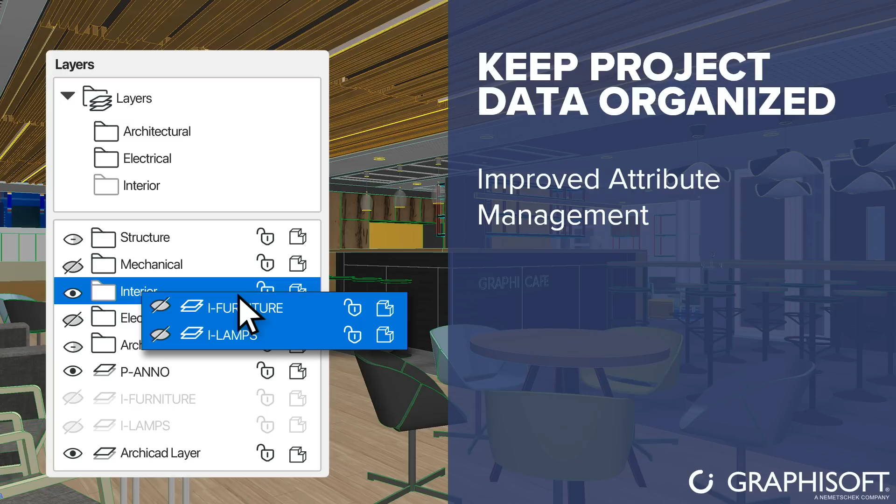Attributes and the Attribute Manager are essential tools for BIM managers and project architects to organize project element-related information for the entire life cycle of the project. So with the latest developments, Graphisoft makes the navigation of attributes easier and more intuitive by delivering a more structured hierarchy to save you time for project management. This way, you can focus on the creative work.

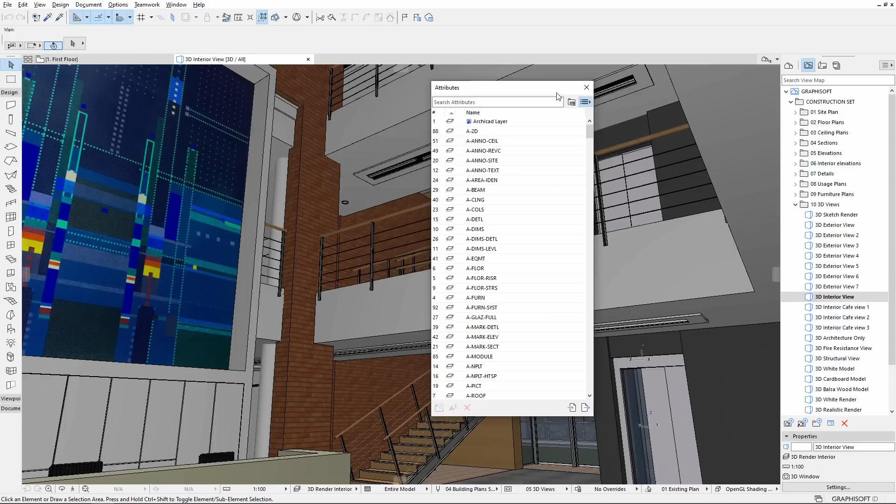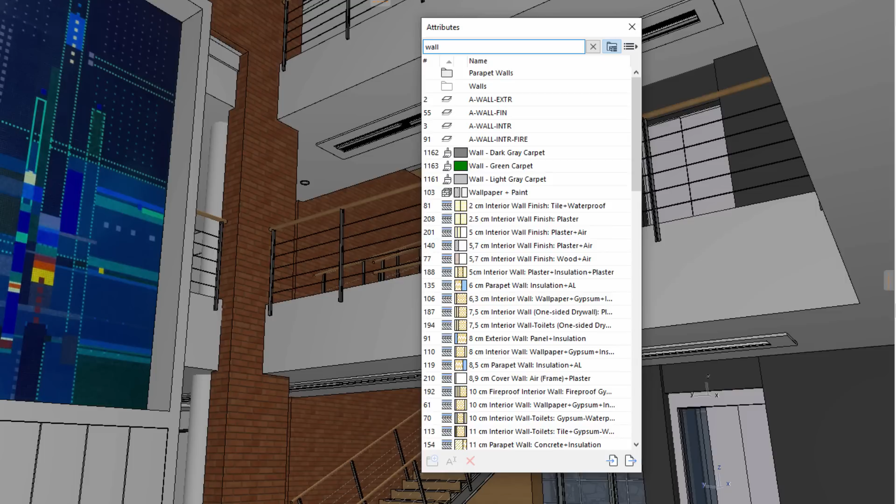The streamlined Attribute Manager palette makes the searching, sorting, and managing of your attributes more comfortable and easier. It reduces the movement between menus so you can get direct and easy access to any of the attribute settings. You can now create folders to organize attributes in a logical hierarchy that works for you and your project.

With the introduction of a search tab at the top, Archicad increases user productivity immensely by allowing you to locate the attributes you are after within seconds, so you can drag and drop them inside folders. This, in turn, avoids attribute-related inconsistencies.

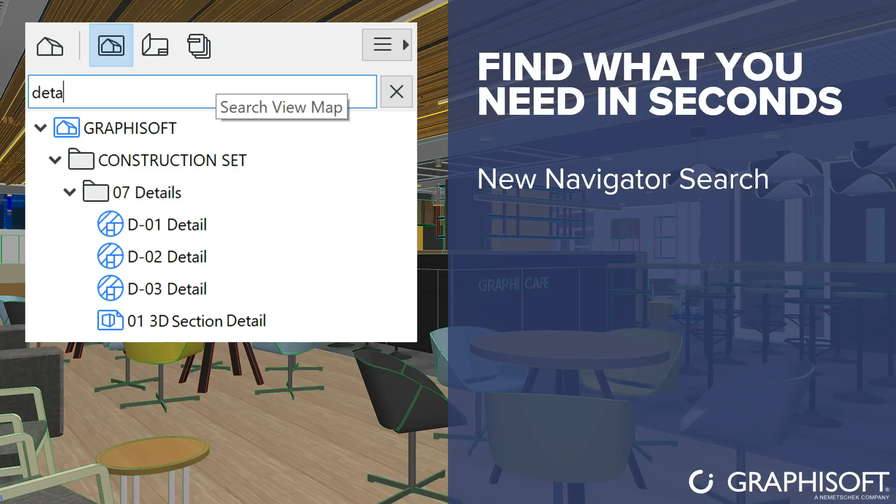One of the crucial factors working in any size BIM project is to keep a clean structure, so that when searching for a specific element in a large set of data, we can easily and efficiently find our way around. In our work, we all know that our projects can evolve extremely fast and have hundreds of sections, elevations, details, or drawings.

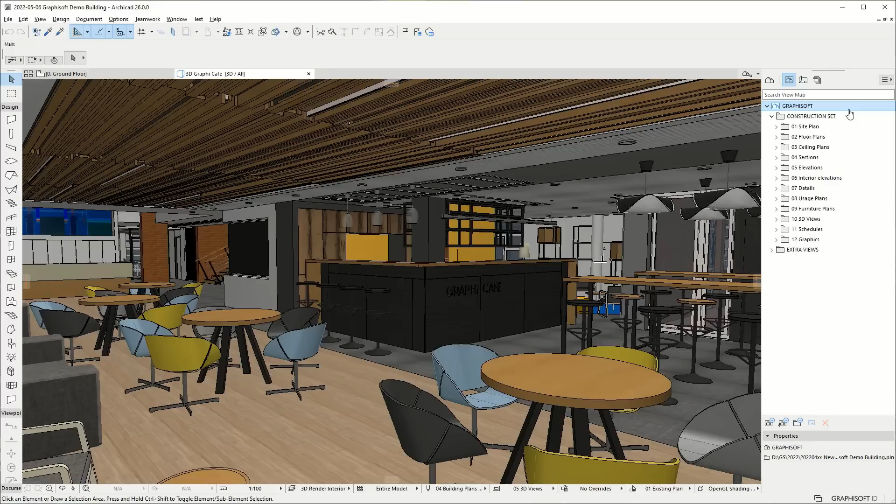In Archicad, we manage these in the navigator maps. Now, this brand new and powerful search bar we have seen with the attributes is also available across the navigator. We can search and find any item by name without having to scroll through lots of folders across all the tabs. This gives us the power to navigate inside the project easier and quicker and simplify the overall user experience by saving significant time every day.

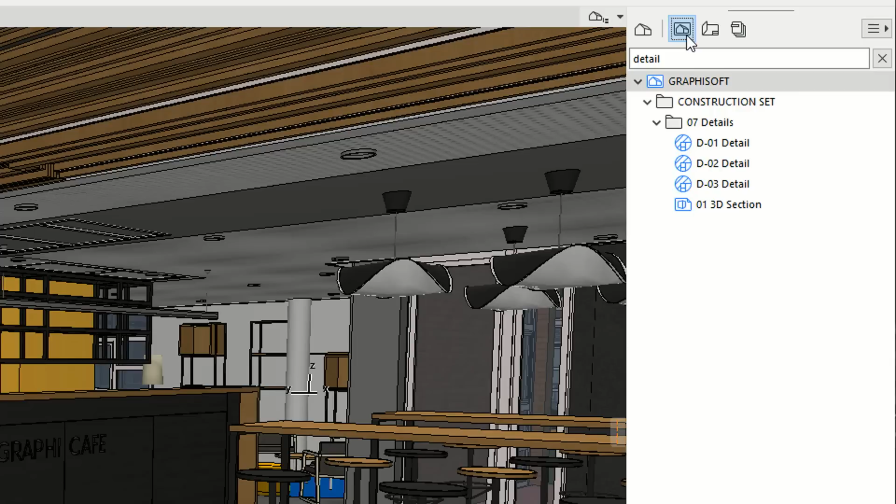Any item selected during the search will be remembered when switching between maps, and closed folders will open during a search, and their state is remembered when clearing the search. And after the search, once the view is highlighted, users now can continue with their work instantly inside that view without losing any time.

As stated by our many beta testers, this fantastic function provides an intuitive and easy solution to keep the organization of views and documentation deliverables, and at the same time, it helps streamline the management workflow in projects with large documentation sets.

Developing project-specific custom content and office standard libraries faster is essential for improving design productivity. Creation of parametric objects enriched with BIM data is now more convenient than ever before with the introduction of a library part maker as a native palette in Archicad, as an additional benefit for forward users. What a great opportunity for those who would like to indulge with their creative sides.

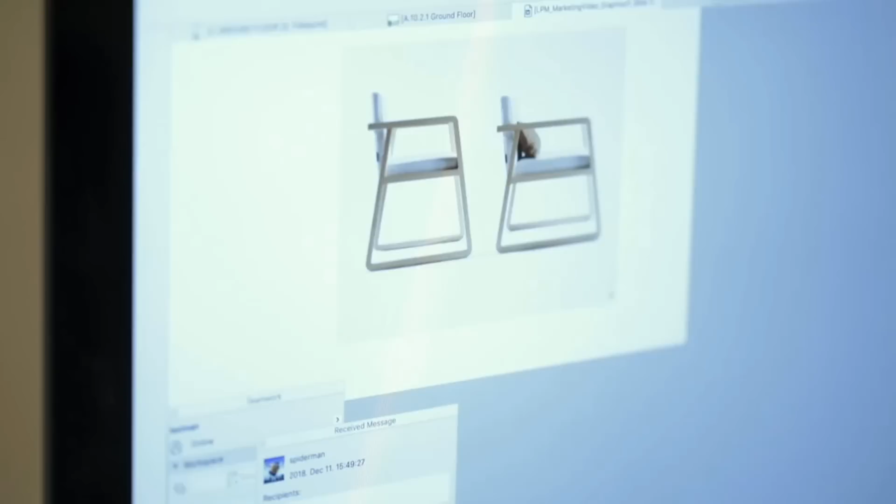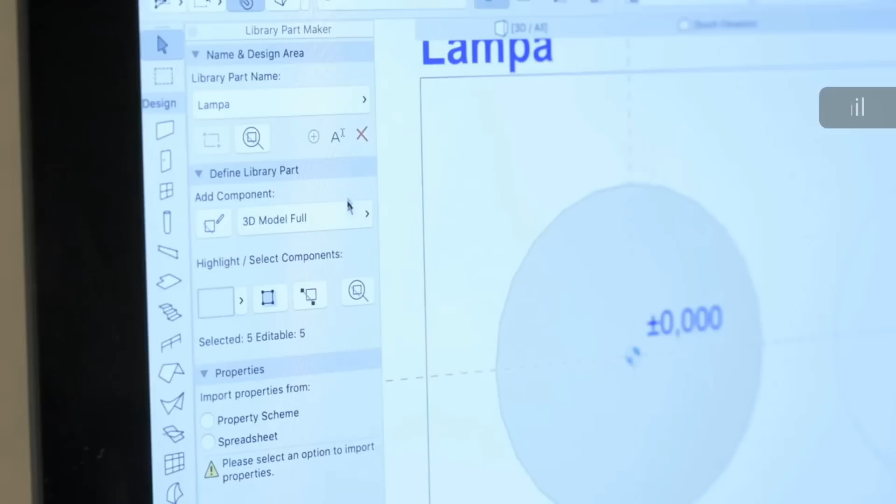With this immensely powerful palette, users can easily create detailed library objects which comply with national standards. Users can quickly create 3D representations for BIM-based workflows and scale-sensitive 2D symbols for traditional documentation within one library part. As part of IFC in BIM, users will be able to attach any data to these library parts with one-click import of data spreadsheets.

In short, by using the Library Part Maker palette, Archicad users can now enjoy a native, data-driven approach while preserving their design freedom. This strongly complements Archicad's software development focus, giving our users the ability to create virtually any custom content as easily as possible and bring their projects to life.

Let's continue with the library content improvements. Every year, Archicad delivers enhanced and updated library content, saving you a great deal of time when modeling. These objects are parametric, meaning you can change them easily on the fly and schedule and quantify with ease, boosting your productivity significantly and accelerating your project visual outcomes.

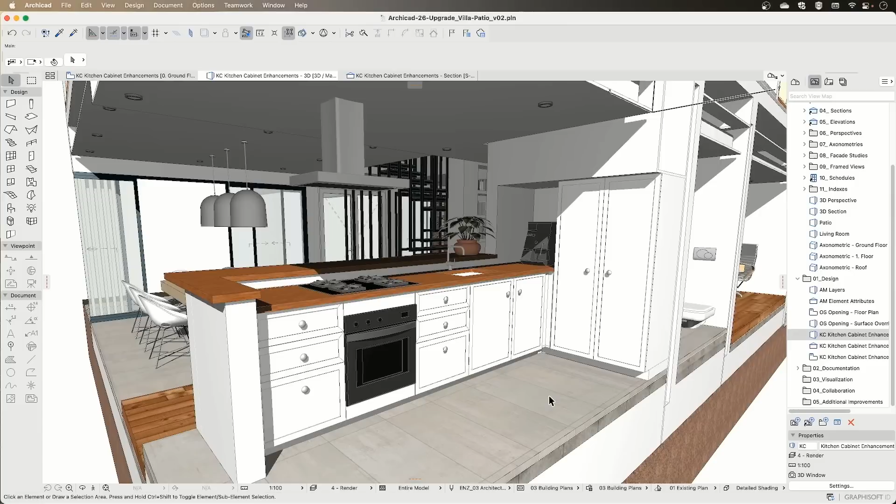For this, we have extended the kitchen cabinets documentation and modeling capabilities. You can now fine-tune the kitchen objects with new frame joinery options, dedicated panels, and undermount sinks. This clearly shows our commitment to constant improvements to our Archicad libraries to keep it relevant and up to date.

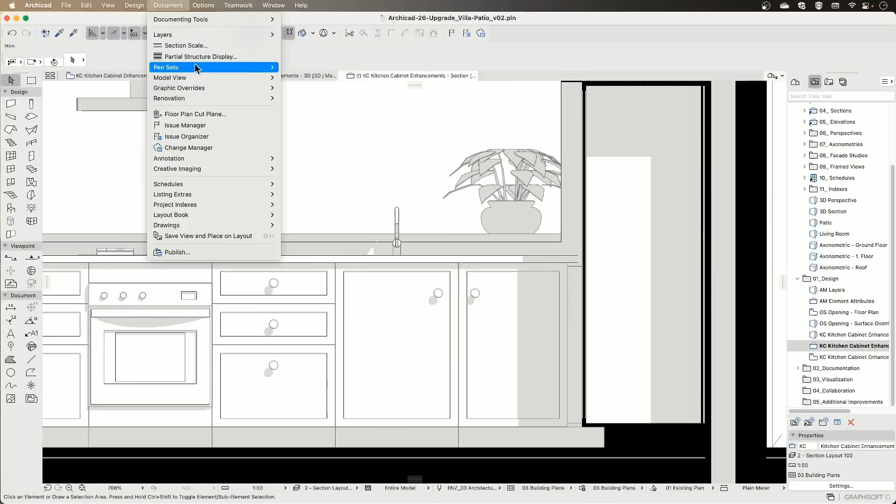You can also control the visibility of counter edges and display the cabinet opening lines in sections, elevations, and 3D with the help of model view options. We are listening to our customers' feedback and provide solutions for the workflow needs.

On top of the brand new features, Archicad also focuses on the fine-tuning of existing tools and workflows based on users' feedback to add value to design and documentation workflows, which are the core tasks of every architectural practice.

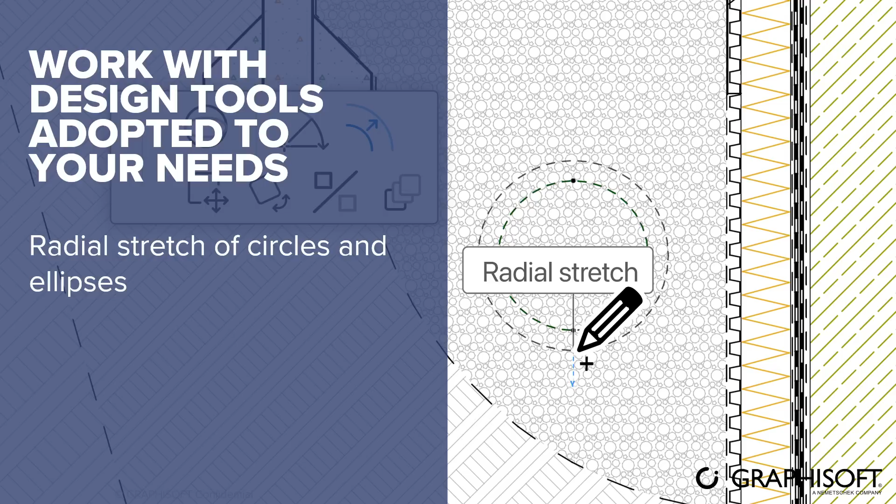One example is the radial stretch copy of circles and ellipses. Archicad users both on Windows and Mac can now click on a node or an edge and create a single copy of circles or ellipses more efficiently in an updated and modernized PET palette.

Consistency in how similar tools work in a software is essential for better usability, increased creativity and productivity, and faster learning curve. The software adapts itself to the architect's workflows and not the other way around.

The construction industry relies on drawing-based deliverables and extensive documentation sets that must comply with local drafting standards. Archicad 26 significantly accelerates the creation of these deliverables by smart workflow improvement solutions. Let's see some examples.

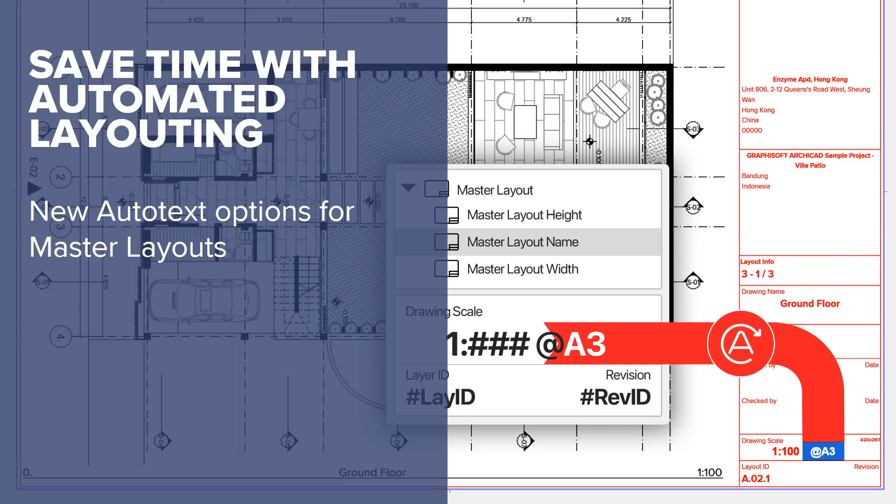Keeping annotations consistent on your drawings is essential for successful project delivery. The new release extends the capability of our Autotext technology, improves documentation quality, and removes an error-prone task by workflow automation.

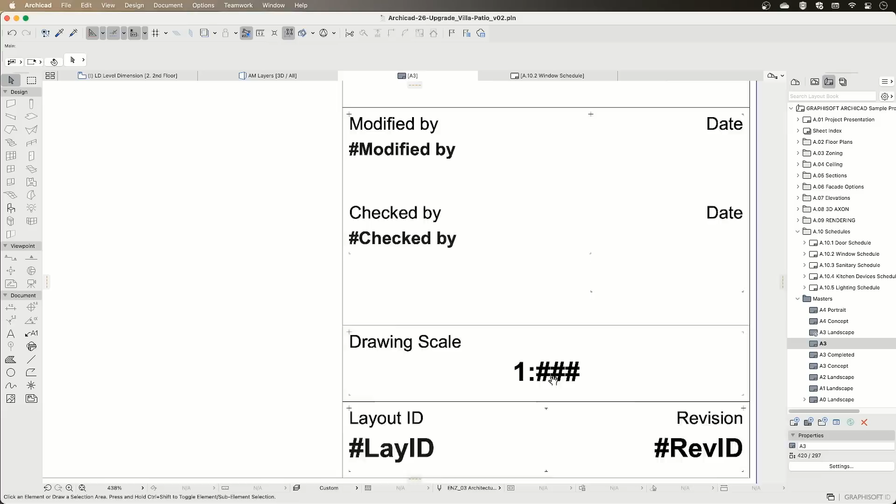The use of Autotext in Archicad introduced Archicad users to great productivity and intuitiveness in documentation. Whether it's an element label on a section or project information on the title blocks, these help architects avoid mistakes when exchanging information. As a result, we have introduced new options including master layout names, their sizes, layout numbers, and total number of layouts in subsets to further accelerate this process.

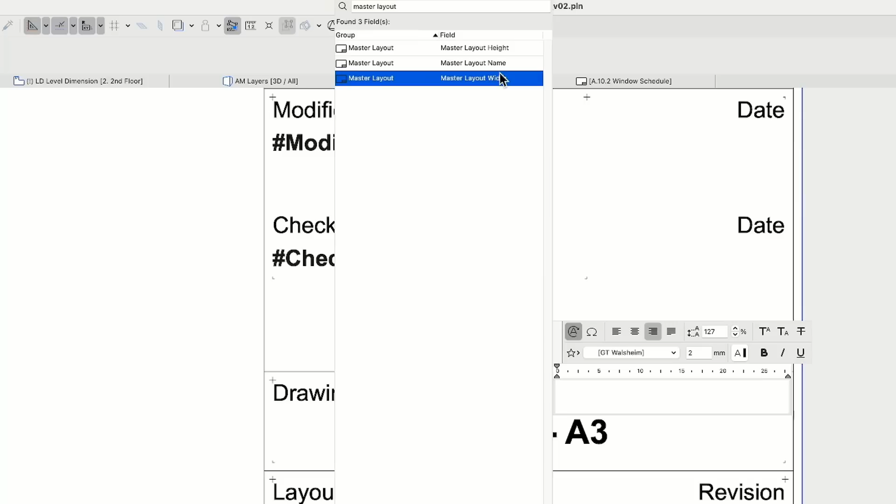This way, users don't need to create multiple project masters, meaning they don't need to spend any time changing multiple layout information manually, and therefore not submitting their drawings with incorrect or outdated information on them.

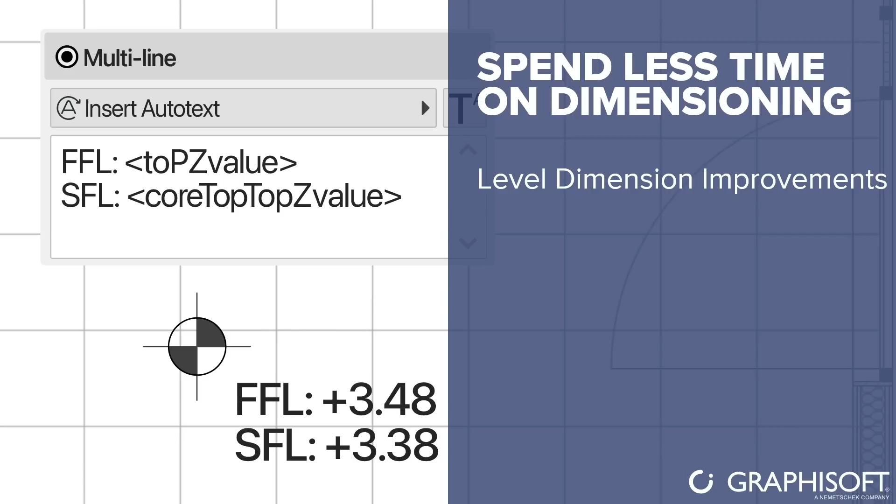Based on several user requests, Archicad has further streamlined the capabilities of the Level Dimension tool to support more documentation standards. The Level Dimension tool now delivers the granular solution that is essential in the documentation process. Let's take a look at the Level Dimension tool improvements in depth.

To start with, we expanded the level dimension for a consistent look and feel against all our other tools. We can now customize the text like other documentation tools, and when associating it to slabs or roofs, we can choose from several extra levels like core top and core bottom to accommodate our various document sets.

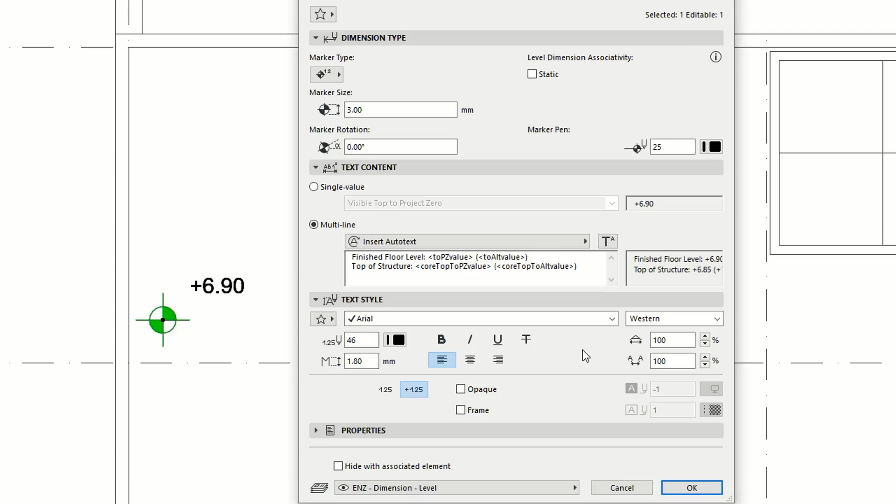These settings can now easily be stored within favorites and updated when needed. Overall, these improvements will automate your project documentation and avoid inconsistency or missing information.

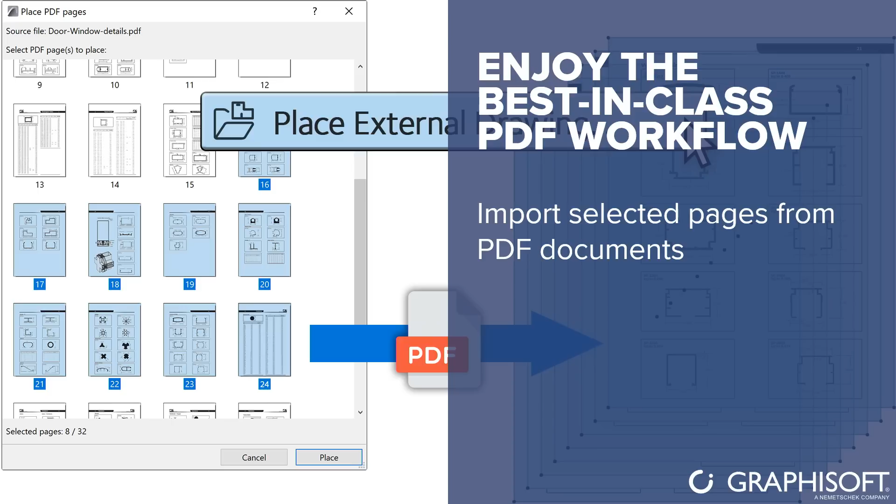Working with the most frequently used industry standard documentation file format, PDF, has also been streamlined. Archicad 26 introduces the selection of multiple PDF pages for efficient import of additional information.

Users can now place multiple pages from the same PDF into their model views or layouts in one go. This function will work either by dragging and dropping your PDFs into your model view or using the drop-down menus. By holding the Shift or Control keys, you can now select several pages at the same time and distribute them to the correct views.

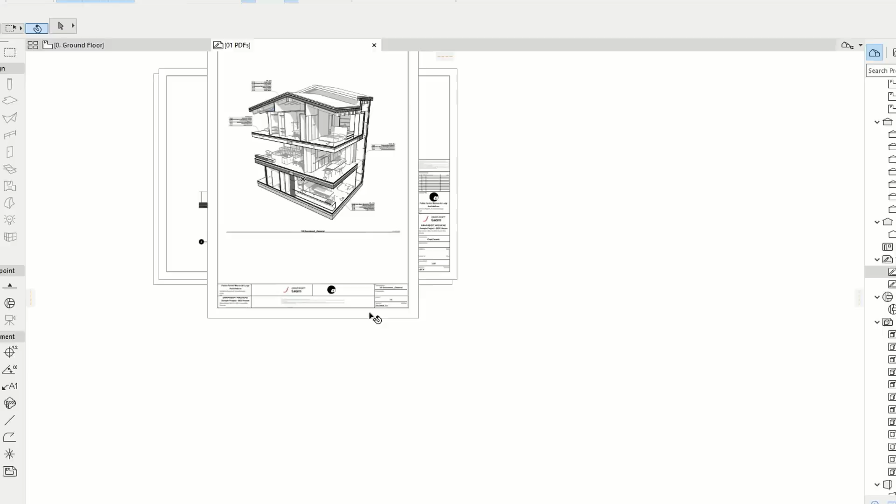This lends itself to a faster and efficient workflow without repeating the same process unnecessarily and manually.

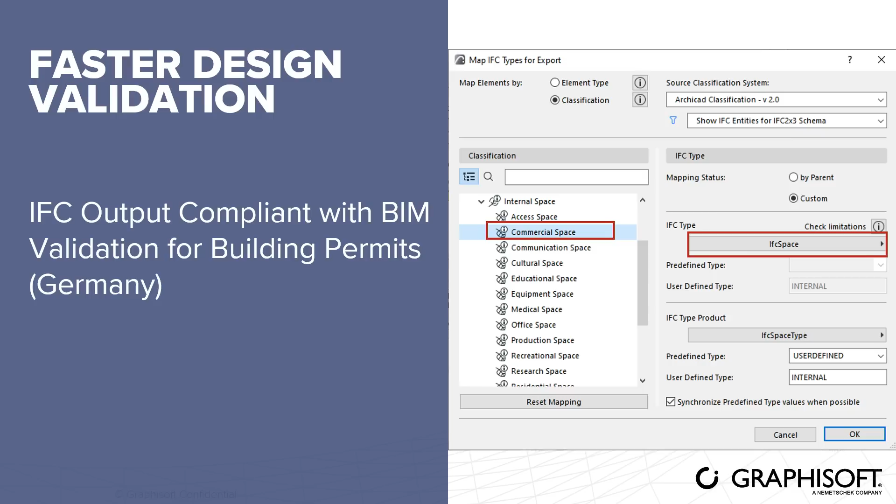Graphisoft is committed to support local design and documentation requirements. So here's an example from Germany. On top of the Zone tool for natively documenting and extracting spatial information for IFC, users can now use the very flexible

and multi-use morph tool to derive the same information. They will also be able to access the Digital Authority Approval Service and submit compliant models straight from Archicad without any extra effort.

Archicad 26 significantly accelerates the creation of deliverables by smart workflow solutions. With all the documentation improvements, Archicad users can now channel their efficiencies from documentation back into where they shine, which is design.

The construction industry relies on drawing-based deliverables, as we have just seen. But alongside this, we also need to provide stunning visualizations. To visualize the concept for your client is essential. Not only will it put them ahead of your competitors, but it will also get their buy-in a lot faster.

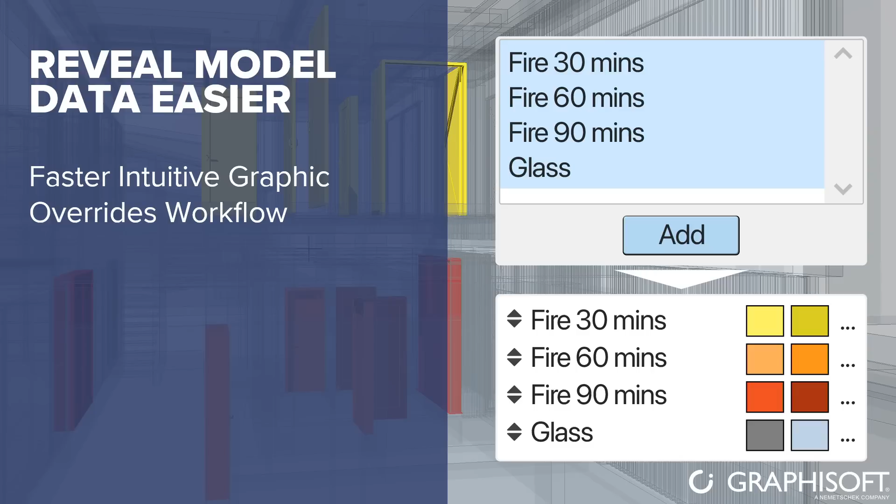Since its introduction, graphic overrides in Archicad have made architectural visualization extremely versatile and powerful. When we think and design in 3 dimensions, then why do we not visualize in the same way?

The Fresh Look dialog will allow for a faster workflow, both in editing and managing your graphical override combinations. Setting up combinations is now quick and easy, with searching for existing rules, multi-selecting, creating on the fly, and adding these rules to a combination in one move.

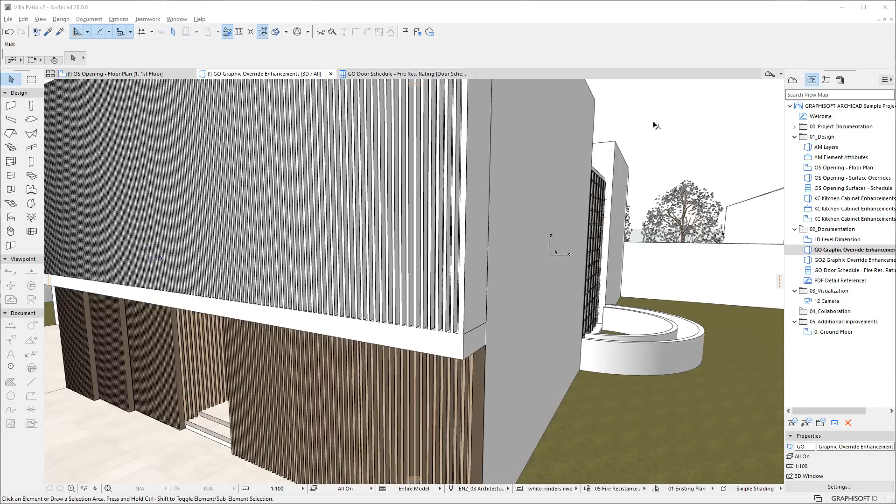New rules are clearly highlighted in blue, so you can find them instantly. And finally, you can multi-select combinations to delete and export all together.

Using the automatic visualization of non-visible data by overriding the default appearance of model data gives endless arrays of actions that you can perform on your model. Our improvements create both a smooth user experience and will enhance the model documentation and visualization process dramatically for your project.

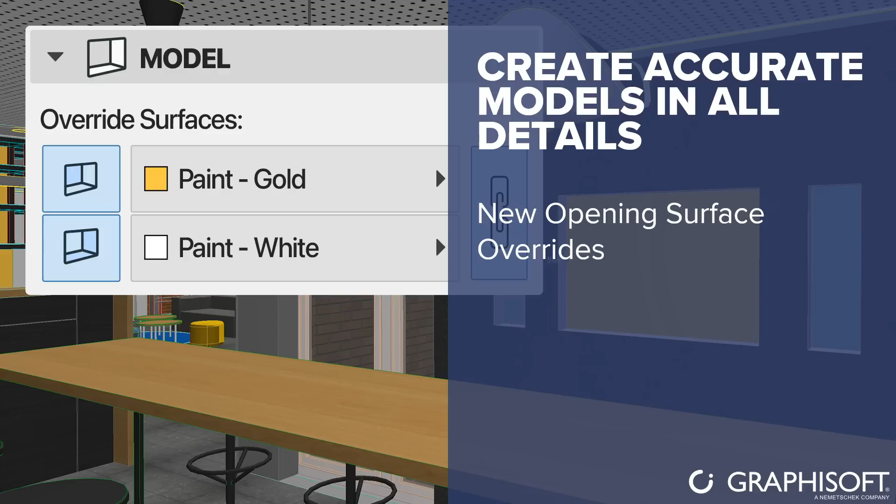A fine-tuning of the openings tool, one of the most frequently used elements in any project, will now allow for a more accurate model and documentation set, even in complex situations of opening elements. We've done this by introducing the new surface overrides.

You can now place both openings and niches and assign separate materials for the opening extrusions and the opening ends. You will also be able to schedule and document these opening surfaces by using the new surface fields to output the painted surface areas along with your surface names.

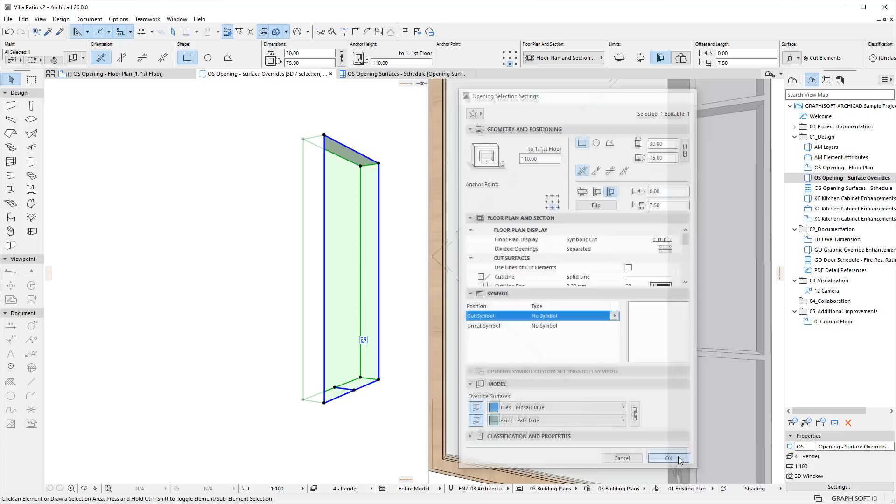Refining the model options in our tools greatly contributes to increased visualization workflow speed, and it will also aid you, the user, to have better control and flexibility to deliver more accurate BIM model data.

With this next improvement, we have answered a long-standing client wish. Archicad 26 introduces an updated surface catalogue, taking the quality of your rendering outputs to the next level. As an additional benefit for our Forward users, the additional surface catalogue will provide fresh surface content to visualize all of your designs.

Setting you apart from your competitors, your stunning rendered images will help grab your client's attention and sell your concepts far faster. The catalogue now includes both new surfaces and modern versions of your existing surfaces.

The fresh surface content will produce eye-catching deliverables, and it will make it easier to grab your client's attention and interest up front. All of this with no need to go to any external applications.

The updated and extended surfaces in Archicad 26 now better serve your rendering capabilities, allowing you the opportunity to produce high-end results with no extra effort.

With Enscape, BIM modeling and visualizations are finally united. Unlike other renderers, you do not have to stop design to create high-quality visuals.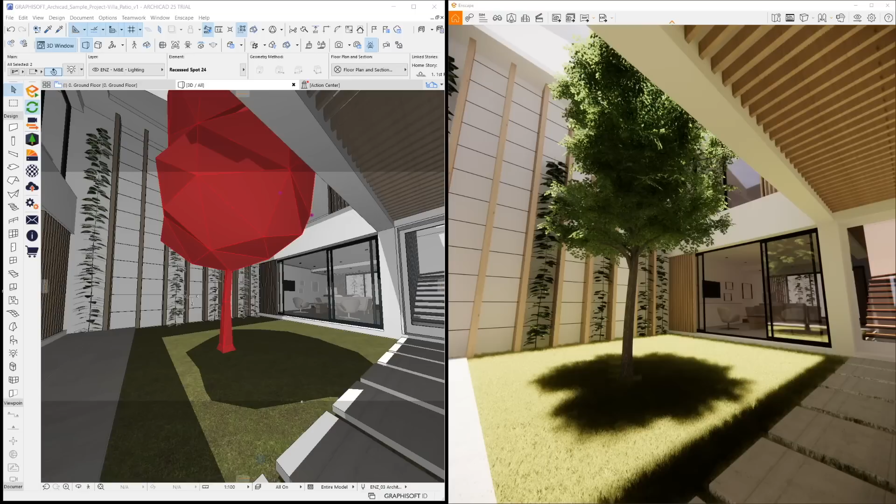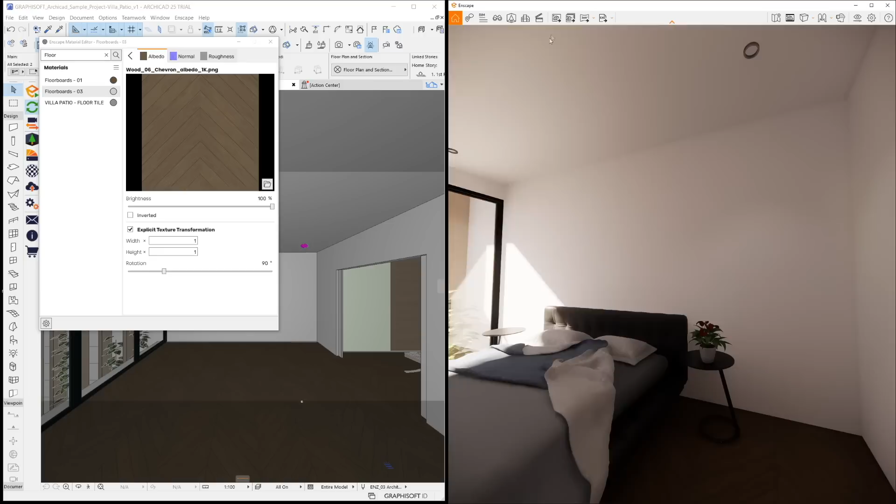With Enscape's real-time technology, your project is visualized as a fully rendered 3D walkthrough, and you can navigate and explore from every angle during any time of the day. With the live link between Enscape and Archicad, you can now follow every update to your plan instantly. Improved export functions now allow Enscape to offer a variety of options to share or collaborate with anybody.

BIMX, the desktop viewer, allows your clients the opportunity to immerse themselves into your world and can really push beyond their expectations. The enhanced BIMX desktop viewer can do just this. BIMX is the interactive project visualization, navigation, and communication solution.

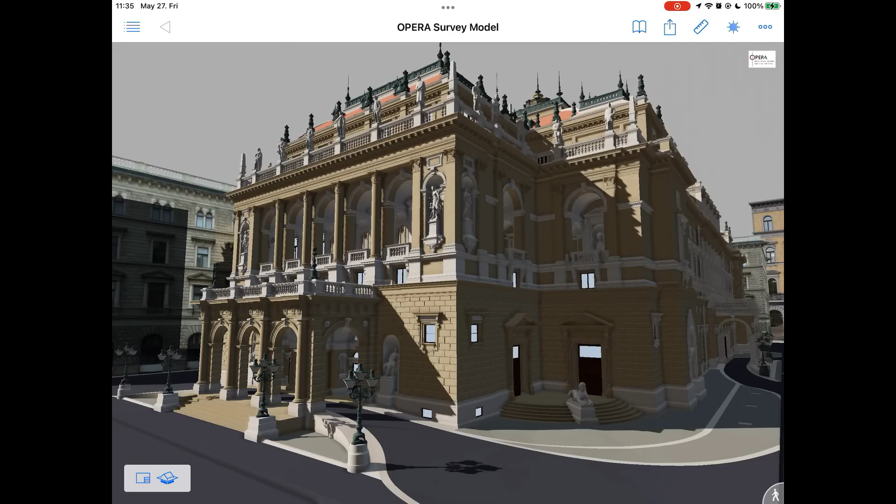BIMX offers a fantastic way to engage your clients on a mobile device. Archicad 26 now offers the stunning introduction of shadows, giving the desktop version similar capabilities to the mobile version, making it very easy to work between the two.

This great improvement will be released in a mobile BIMX app update until the end of Q3 on both the iOS and Android platforms.

So saturate yourself and dive headfirst into this colourful world. Break the boundaries and see just how far you can go.

Numerous surveys conducted by industry groups show that projects have become bigger and more complex, and our clients now demand richer data. More stakeholders must coordinate their efforts more effectively to meet shorter deadlines.

In today's collaborative construction industry, it's essential that all project stakeholders work effectively together, regardless of their physical location and the software that they use. Coordination of disciplines and design is unavoidable for project success and increasing your profit.

Graphisoft's cloud-based collaboration platform has become more powerful by being able to manage more than 100,000 files on its servers. This allows project teams to work with extremely large projects with exceptional performance. So let's take a look at how different disciplines can now work effectively together on the BIMcloud Archicad platform.

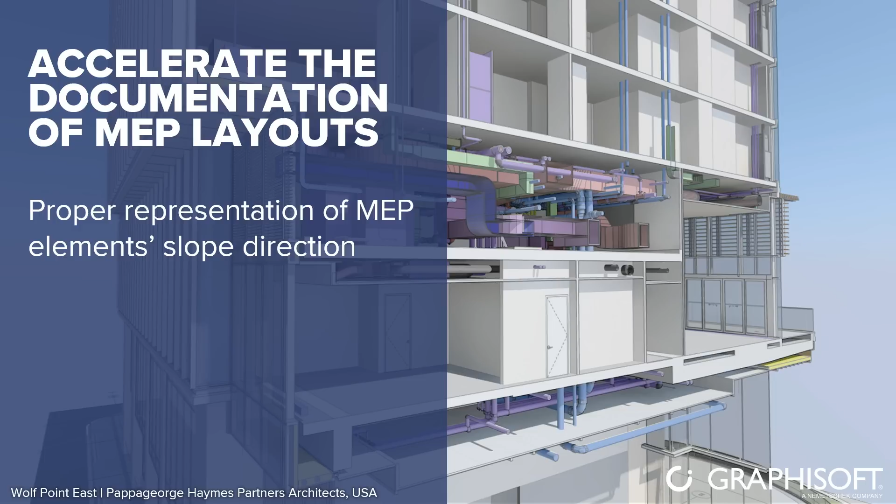Any modern building today cannot exist without building services. The importance of having this profession part of the integrated design process is crucial.

The simple visual representation of slope direction for MEP elements is a vital addition to our MEP functionality. We can now produce a clean graphical visualization of a slope via a combination of arrow and slope data, and this will give you the correct representation for all of your documentation.

New building material properties for environmental sustainability will also assist you in addressing pressing concerns related to global warming and carbon footprint issues within your designs.

We have added a dataset for ecological evaluation of building materials, and we've corresponded this to standard environmental indicators. You will receive validated and reliable building data straight from the box, and you'll be able to use it confidently for your various analysis purposes.

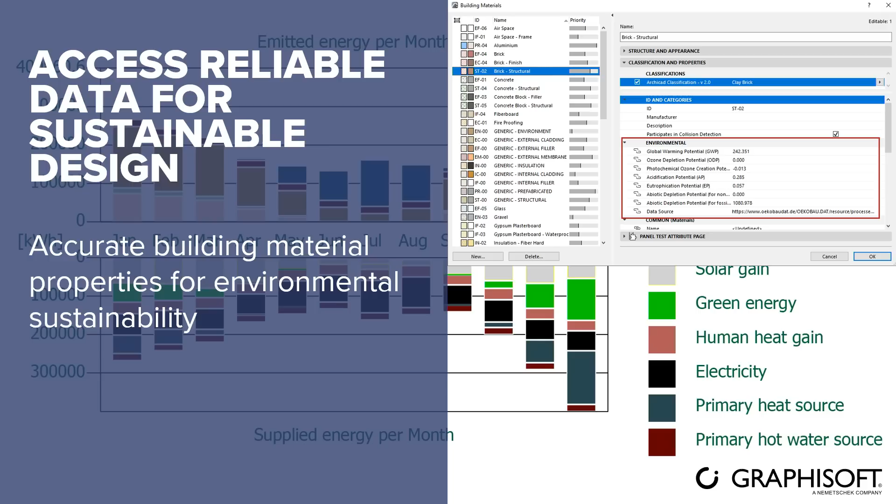Now let's take a look at our next major collaboration focus area, the structural analytical design. With the introduction of the integrated structural analytical model, Graphisoft made a revolutionary step.

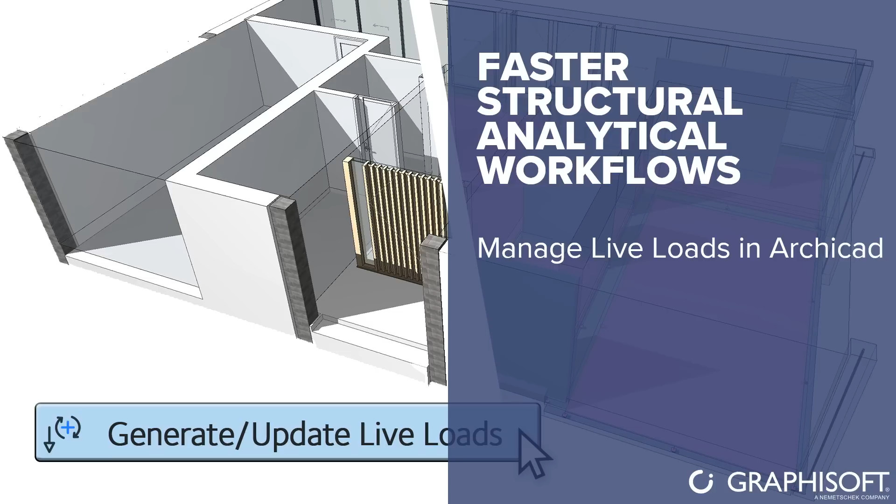Now this workflow has become even more powerful, and the new data exchange capabilities promote a new fluid workflow. The quality of the data exchange can now handle even overly complex geometries, and it can translate them more precisely for communication with your structural analysis domain applications.

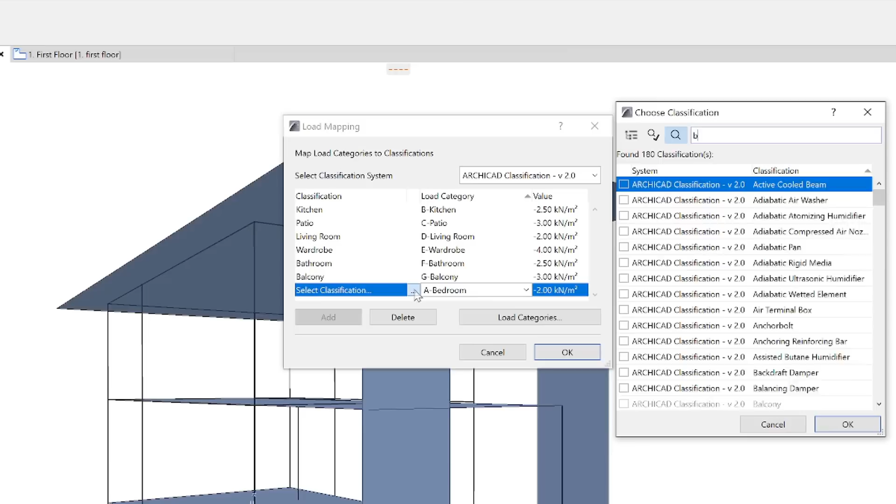Structural engineers will have access to more detailed information, and this comes directly from your physical model. It will also enable faster interoperability with limited need for manual user inputs.

This enriched feature will allow you to generate live loads from any of your Archicad classified zones. And now, working together with our engineers, we will become an efficient team with less time spent on design coordination tasks.

With Archicad 26, multi-segmented analytical elements such as beams or columns can now be precisely represented in the analytical model.

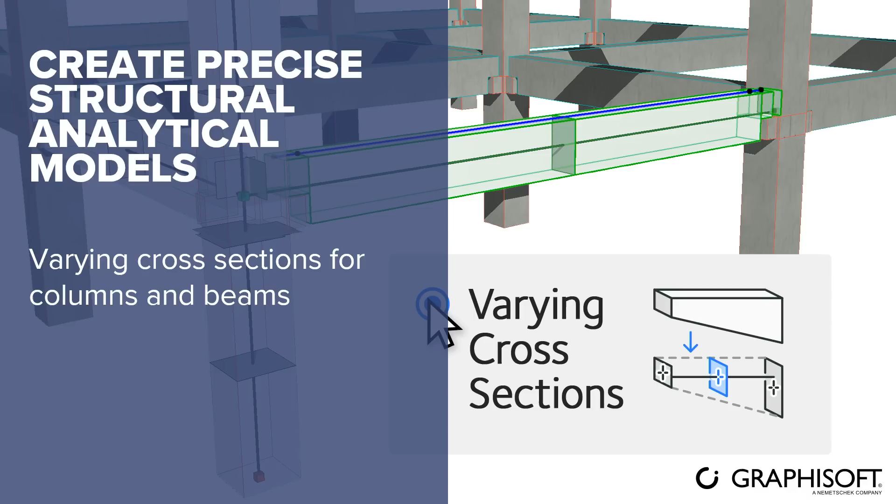And these can be exported with SAF files. We have also introduced the varying cross-section and replacement profile options to further improve the integrity of your model, and this will also help preserve the details of your physical model.

When we introduced the Structural Analytical File Format, SAF, to Archicad, it already significantly reduced the time needed for exchanging analytical models with your engineers.

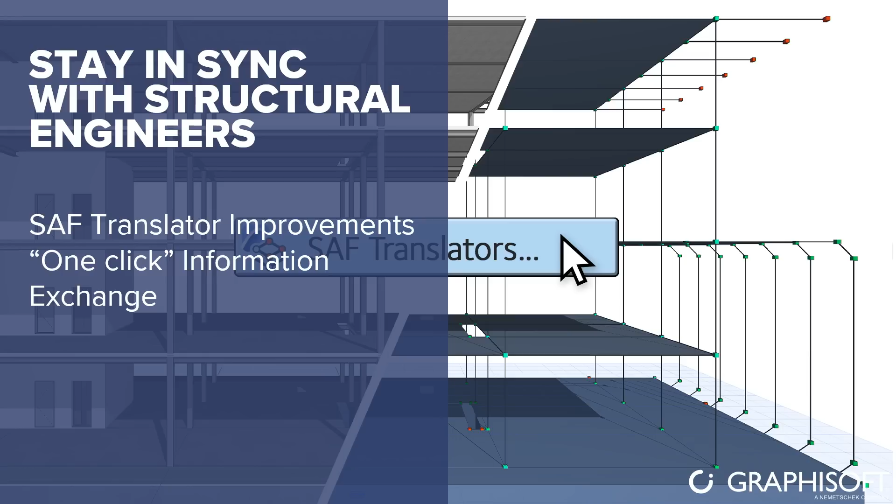Now this workflow has become even more efficient, and we've created a set of SAF translators to be used with the different softwares and their versions.

The improved interface also means faster and an easier workflow, allowing you to search and customize the settings to meet the particulars of any of your structural applications. Streamlining the SAF interface will also bring consistency in the use of our export translators.

Graphisoft has always been committed to promoting and supporting open collaboration workflows. Managing IFC files, the most frequently used Open BIM Exchange protocol, has been further improved in Archicad 26.

We now allow better coordination with any BIM application, and it's now possible to handle and manage not just the element data, but the component data as well.

We can change the IFC type with the help of type mapping being enabled for our components, and we can also add custom components-related properties using the property mapping.

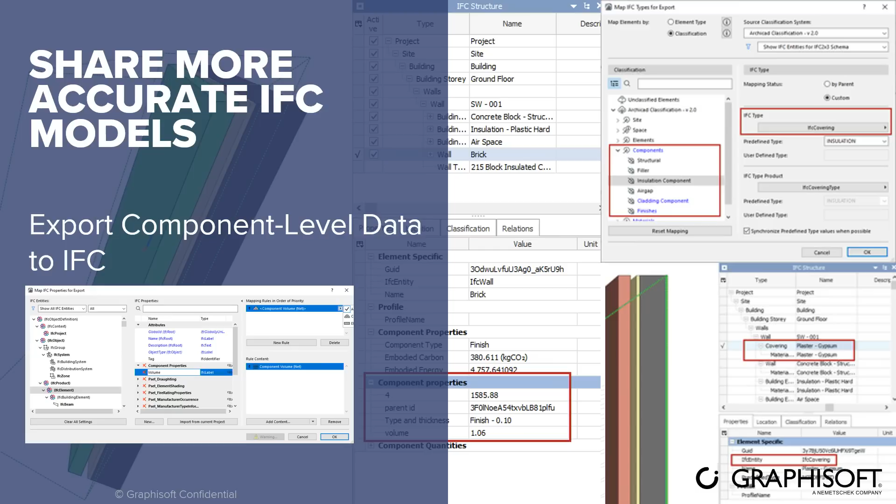The exported IFC model will export your Archicad elements according to the client requirements, and this will give you improved integrity of your data.

Behind the scenes, Graphisoft has been working together with Nemetschek, our brand sister company, to provide the most streamlined collaboration workflow for structural engineers and architects.

So let me introduce to you Frilo, a leading provider of innovative calculation solutions for structural analysis and structural design.

Frilo software solutions are characterized by their ease of use, their fast results, and the continuous adaptation to current standards. In doing so, Frilo follows the practical requirements of the engineer's everyday life, and to continue with this workflow improvement, we have developed a direct Frilo export, making the Frilo connection a one-click export process.

When utilizing Graphisoft solutions, everybody in the team is excited about the results.

Let me conclude by talking to you about performance. The better your design application can exploit the capabilities of your hardware, then the faster you can deliver your projects to your clients.

And now we have great news for our Apple users. Archicad 26 will run native on ARM-based Apple computers with an update that will be available in Q4.